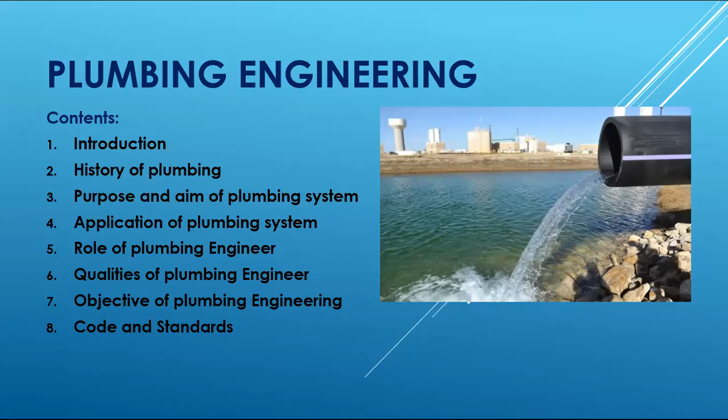Engineering introduction. What is meant by plumbing? The plumbing is a system that conveys fluid for a wide range of applications by using pump, valve, pipe, and other equipment to convey the fluids. So this is the definition for the plumbing system.

The word derives from the Latin for lead. Lead means material. Lead material is plumbum. At the first, pipes used in the Roman era were lead pipe.

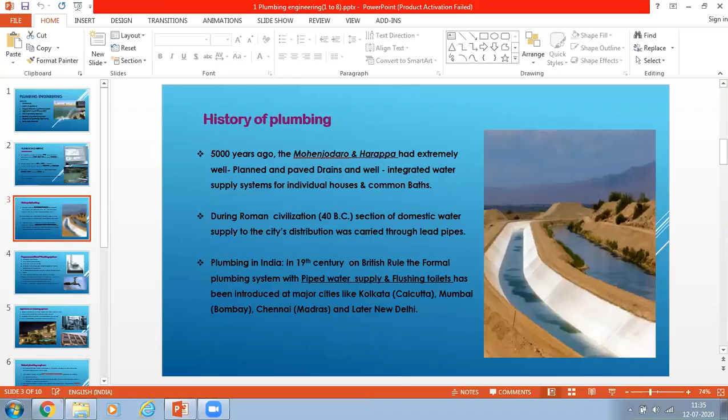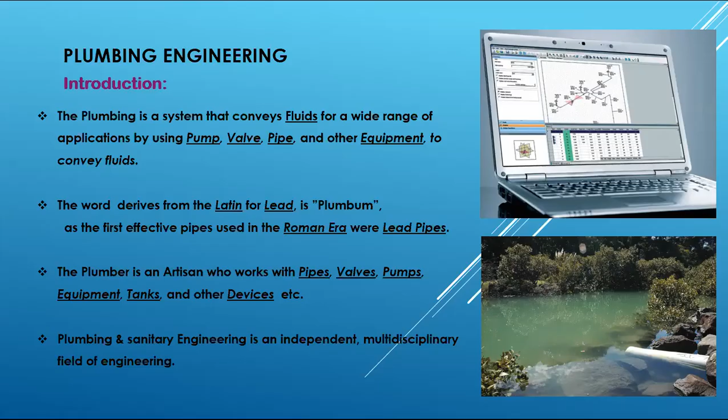The plumbing and the sanitary engineering is an independent multidisciplinary field of engineering. This is the plumbing engineering introduction. History of plumbing. 5,000 years ago, the Harappa had extremely well planned and paved drainage, well integrated water supply system for individual houses and common baths. Some years back, Harappa civilization.

Has well planned drainage and water supply system. They used channel system and independent house connection also. The plumbing has started 5,000 years back. During Roman civilization, 40 BC, domestic water supply to the city distribution was carried through lead pipe. The Roman civilization used lead pipe also.

Plumbing in India: in the 19th century under British rule, the formal plumbing system with piped water supply and flushing toilet was introduced in major cities like Kolkata, Mumbai, Chennai, and later New Delhi. So only in the 19th century we got the plumbing system, because of the British.

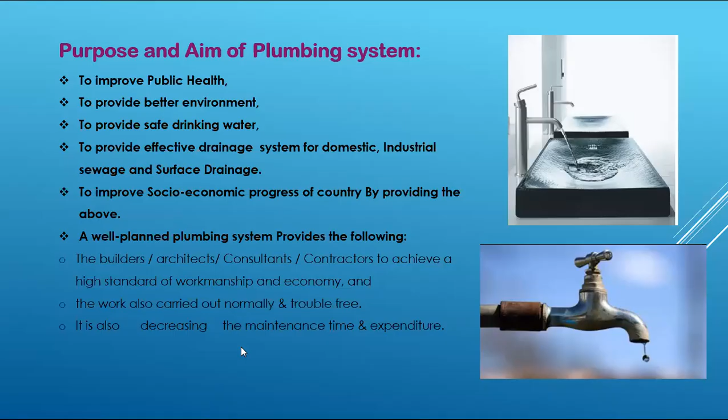Application of plumbing system: where are you going to use a plumbing system? Domestic applications: individual premises, apartments, township, etc. Industrial applications: manufacturing process, etc. For the industrial building, we are providing water supply for employees, and also for equipment and washing purposes, we are providing water supply and drainage.

For example, for a food factory like Maaza and Coca-Cola, we are providing water supply for the manufacturing of the bottles and juices. Then we are also draining the effluent water from the equipment and treating it. Again, you give the treated water to equipment or for flushing the toilets. We are recirculating the water also.

Commercial application: malls, multiplex complexes, hotels, hospitals, etc. We are providing plumbing systems for water supply and drainage. Public transportation like railway, airport, bus terminals, etc. We are providing water supply and drainage for the public.

For individual houses, apartments, townships, etc., we are providing STP, sewage treatment plant, for treating the sewage. For industrial and commercial applications, we are providing ETP, effluent treatment plant, for treating the drainage. For public transportation like railway, airport, bus terminals, we are providing sewage treatment for drainage recirculation and treatment.

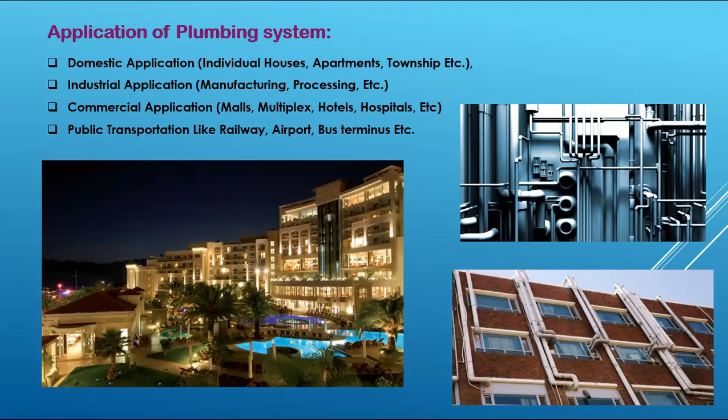Hello, all are listening? Yes, sir.

Yeah, listening, sir. So we are going to the role of the plumbing engineer. Plumbing engineering studies all aspects of engineering and design of the water supply and drainage systems required in the building. The plumbing engineer is to protect public health and environment by providing the following: first, safe drinking water and an efficient and adequate drainage system designed scientifically by using basic hydraulic principles and practical consideration.

For water supply and drainage, we are going to use scientific formulas. But you also have to keep in mind some basic parameters and practical considerations. Don't just use a formula and put it into your pipe size and flow. You have to consider site conditions, what they are going to use, and who the people are that are going to use this system. Then only you apply it.

Otherwise your cost will increase. Sometimes you will not provide pipe and water supply in some area. Sometimes you are not going to provide drainage for some area. So you have to keep that practical consideration in mind. Then only you can give a better plumbing system.

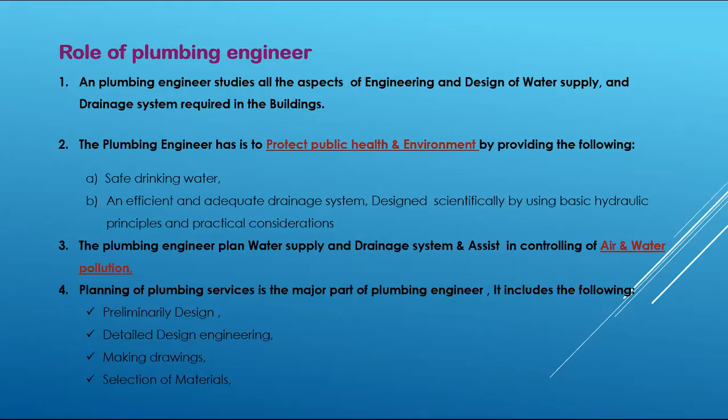Estimating cost, preparing tenders. After estimating the cost, you prepare the tenders. Then selection of the contractor. Then periodic and site inspection. After launching the project, after giving it to the contractor, you have to do periodic inspection. You are the engineer, the plumbing engineer.

You have to visit and see what is going on at the site, whether they are following our drawing, our design, our product. Every time you have to watch and give a report to the client. Periodic inspection and periodic site visits, and accepting the work after commissioning.

After completion of the above, you have to accept the work. See if it is okay, then you have to accept it and sign off the finished product. That's all. That is your work.

Qualities of a plumbing engineer. The plumbing engineer must be educated and trained. Educated means not only being educated, but you will get knowledge of the plumbing system. So that is called educated. And trained also. He must hold relevant knowledge in hydraulic, mechanical, civil, electrical, fire protection systems, etc., in order to plan the services efficiently and economically.

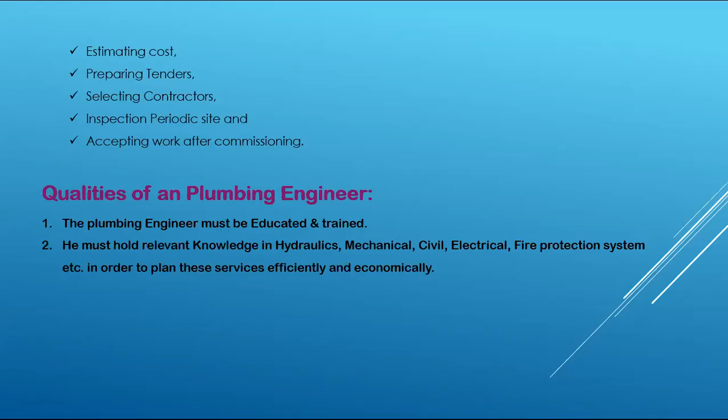Objective of a plumbing engineer. How we will achieve our plumbing role. We will achieve the plumbing role from the following objectives. Objective A, water supply. Provide safe drinking water. Provide adequate supply of water. Safe drinking water means what? You have to give it without contaminating the drinking water. The drinking water should not be contaminated with other products, drainage or some other particles. We have to give safe drinking water.

We have to give a proper overhead tank or underground tank or some above ground tank. You have to provide it for the drinking water. It should not be contaminated with other services, other types of materials. And provide adequate supply of water.

Adequate supply of water means, for example, think of an occupancy of 100 people living in an apartment. If you are giving some 1,000 liters for the 100 people, it will not be sufficient. For the 100 people, you have to give at least 135 liters for each person for economic services. 135 liters per day into 100 people. So 13.5 thousand liters. You have to provide 13.5 thousand liters for economic classes.

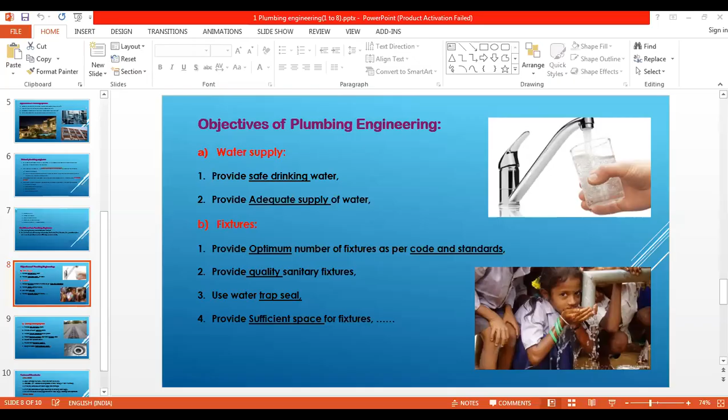We will see in future how to calculate water balancing and the water supply system and all. So now we are telling the fundamentals only. And the fixtures. Provide an optimal number of fixtures as per code and standard. For one house where 5 or 4 people are living, how many toilets are you going to provide? One toilet for each person is more. It will not be optimum. But providing only one toilet for five people is also very troublesome.

If you see a common family, some 10 people are living. If you are providing a single toilet, and five people are going for a job or some other business, it will be trouble in the morning. That's why our board also gave some formula for providing toilets and fixtures. Based on the code only, we are going to provide the number of toilets, number of fixtures, number of taps, everything.

Provide quality sanitary fixtures. Quality sanitary fixtures means a lot of fixtures are there in the market. So you have to compare cost wise, quality wise, and lifetime also. You have to compare with previous project feedback. Sometimes in a previous project you provided some fixtures that did not perform as you expected. You will get the feedback from the client or builders or buyers. Then based on the feedback you will change the product for the present project.

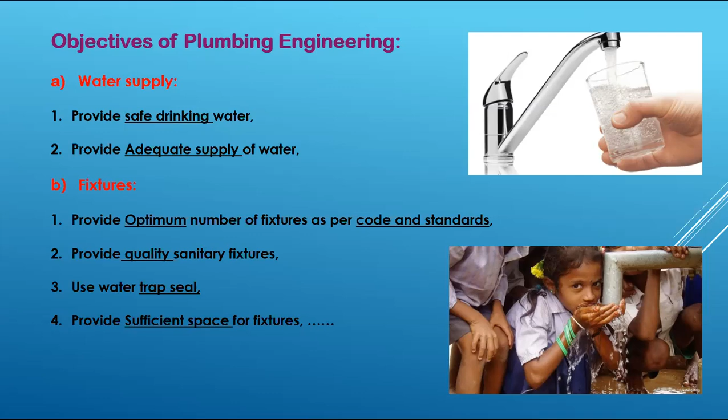Drainage and sewage system. Provide a safe drainage system. Safe drainage system means the drainage system should not contaminate the other pure water or rainwater system. Provide a sufficient ventilating system. If you have one toilet without a ventilating arrangement, are you able to use the toilet? You can't. You can't stay in the toilet even 1 minute. So every toilet should be ventilated.

Then also our plumbing system, piping system should be ventilated. Water supply also, drainage also should be ventilated. Then only you will achieve good performance from the drainage system and water supply system. You can also see every drainage system has ventilation on our roof. If you see on our roof, there will be a vent cowl for each vertical stack.

Provide supplementary ventilation. We have different ventilating systems for large plumbing systems, large plumbing drainage systems. We have a different ventilation system also. You will see it in depth in future.

Prevent foreign substances into the system. Foreign substance means if you have a drainage system or trenching system, somebody will put a bottle or some polythene covers or something. For preventing that, we have to provide a pakka covering system, then only other particles will not go inside the drainage. So you have to provide a pakka covering system for the underground water supply also. You have to cover. Then only other particles will not enter your plumbing system. Then only you will achieve a pakka plumbing system.

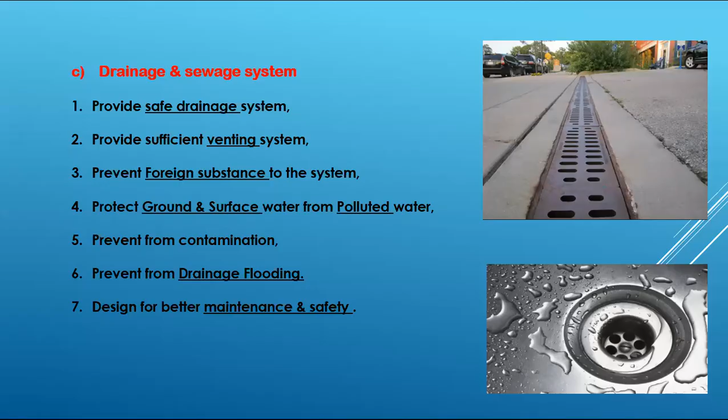Code and standard: what are the basic codes we are going to use for the plumbing system? You have to keep this in mind. First, while designing the project, think about whether it's a Chennai, Pune, Mumbai, or Delhi project. You have to think about the local municipal bylaws and local law, because every city has its own local laws.

Local laws specify how many taps we have to provide, how many toilets, how many sumps we have to give, what storage type, whether STP is required or not - everything is provided by local municipal laws. Only then will you get approval from the municipal corporation; otherwise they will not give approval.

Then you have to follow NBC, which is common for all of India. You have to follow the National Building Code of India. In Group 5, Part 9, the plumbing system comes. From Part 9 only, you get the plumbing codes. You also have to see all other codes, for providing chamber sizes.

Everything you have to see - other civil codes and for fire, especially firefighting, you have to see the firefighting code also. Everything is there in NBC. Based on NBC only, they have derived the municipal laws also. Sometimes they modify a little bit - 10% extra, 10% less. So first you have to see the local municipal law and NBC.

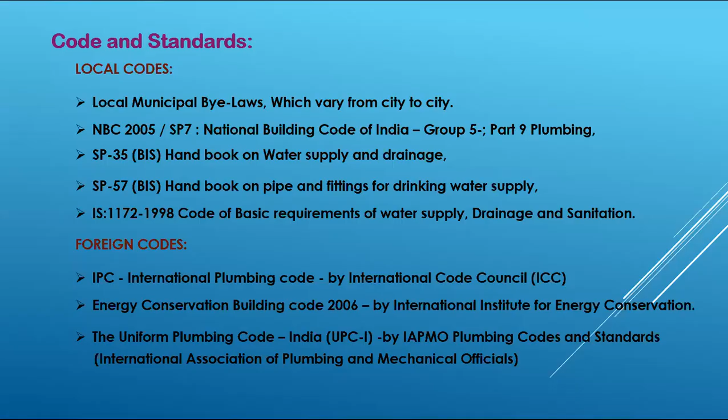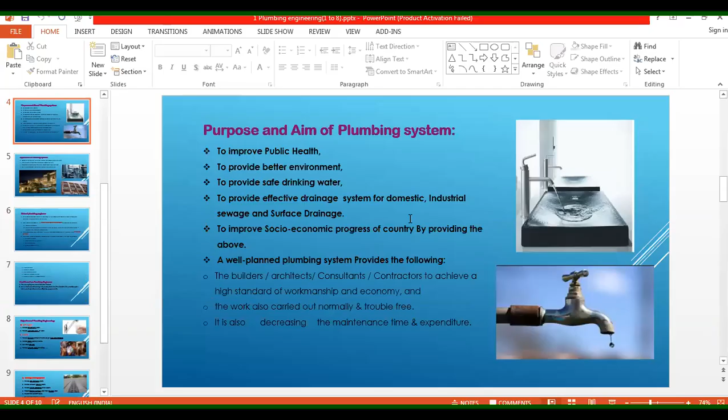We'll go for the other window.

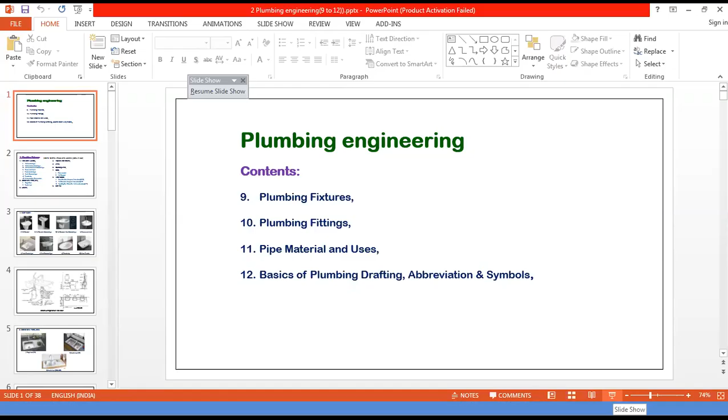Plumbing engineering content: plumbing fixtures, plumbing fittings, pipe material and uses, basics of plumbing, drafting, abbreviations and symbols. So we will first know the plumbing fixtures - the types of plumbing fixtures we have.

Wash basin and lavatory. In wash basins we have several types: wall mounted type, wall mounted pedestal type, wall mounted semi-pedestal type, corner wash basin, under-counter type wash basin, semi-recessed type wash basin, counter top wash basin, and above-counter or over-counter wash basin. These are the 8 types of wash basins we have.

Kitchen sink or pantry sink are both the same - single bowl or double bowl. Normally single bowl only is used in the pantry area. Double bowl or single bowl are both used in the kitchen based on client requirement. Sometimes triple bowl is also there, and customized kitchen sinks are also there, based on the client's requirement we will provide.

Lab sink we will use in lab area, lab projects, hospital projects. Normally ceramic, vitreous china, concrete, plastic, wooden, or stainless steel - a lot of materials will be used for the sink and lavatories. Mop sink and servicing sink we will provide in the service area.

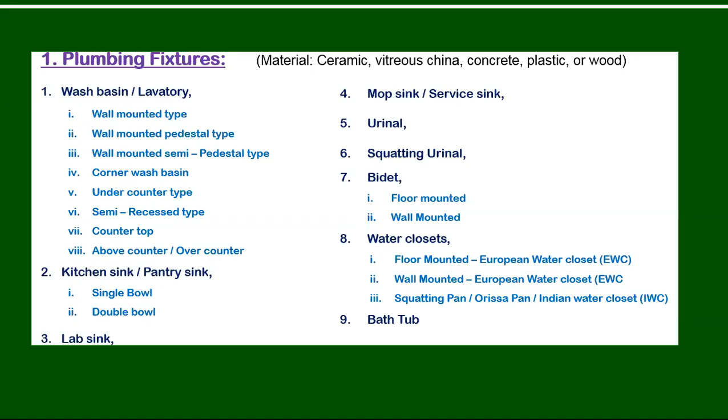Wash basin - you will see wall mounted wash basin. It will be mounted, one tap will be there. Wall mounted pedestal type - pedestal means this vertical material will be there. Now this is called pedestal. It will support the wash basin also. Wash basin will not pull down, it will mount in the wall itself by screwing or bolting.

Then additional support will be there, that is called pedestal - this vertical piece is called pedestal. Wall mounted and semi pedestal type - the semi pedestal piece will not touch the ground, the pedestal will be semi, half size only. It will cover the bottom pipes and drains, cover them and give a better look.

Corner wash basin - when space is not available, we will use corner wash basin. Suppose in our project space is very limited, very little space to provide toilet, we can save space by providing the corner wash basin.

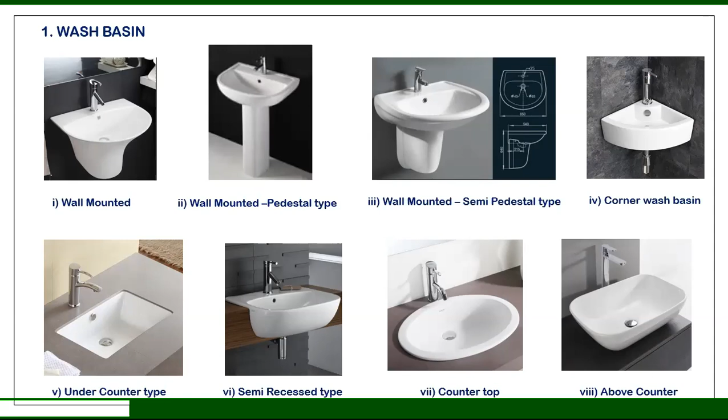Then we will provide for the mixer - instead of just providing a bib tap, we have to provide a mixer. Then you can use whatever temperature you require, you can adjust and use it.

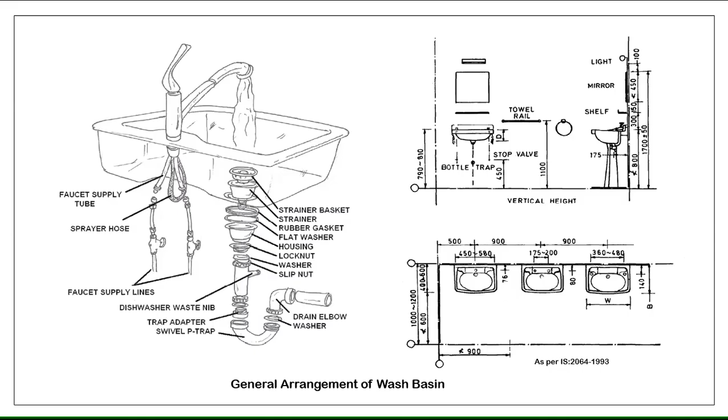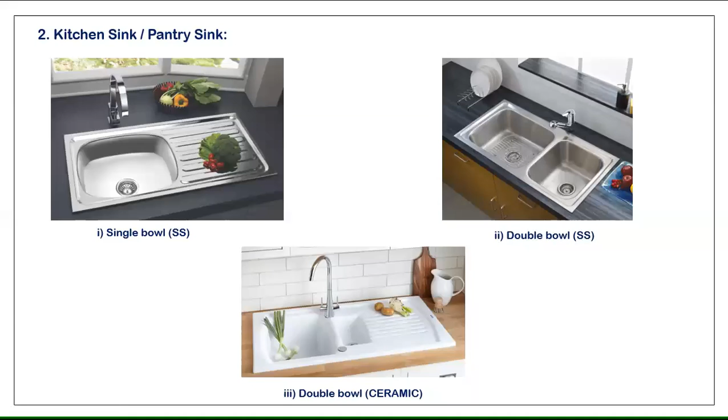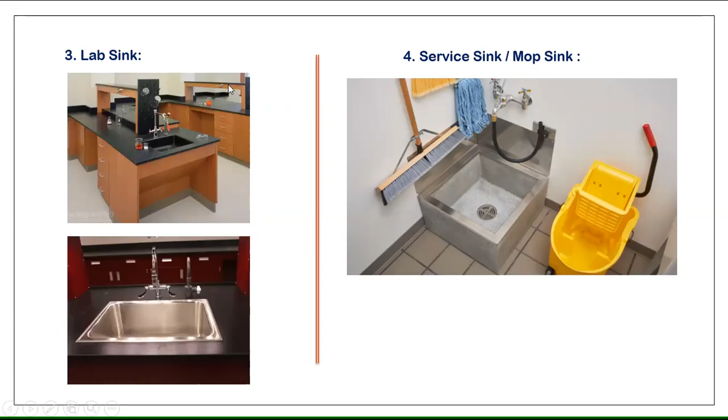The general arrangement of sink and wash basin are both the same. If you look outside there will be a difference, but the drainage and water supply are both the same. Both will have a faucet and mixer. After that, connecting hoses and angle valves for hot and cold water will be there, and supply lines will be connected into the angle valves. These are the water supply and drainage, the same thing.

Strainer basket, strainer, rubber gasket, flat washer, housing - all these things will be kept into the housing. The housing will be locked by the lock nut and washer, slip nut, and the dishwash nipple. If you have a dishwasher in the project, you can connect into this link; otherwise, you can also put it into the floor line. Slip nut, washer, everything will be there.

Here also we are going to provide a P trap or bottle trap. P trap is the traditional one; now alternatively we are providing bottle trap also. Bottle type, if you see in a hotel or some other commercial building, will be there at the bottom of the sink or wash basin - that is called a trap. This is very important for our plumbing system; it prevents foul gas, and insects from the main drain.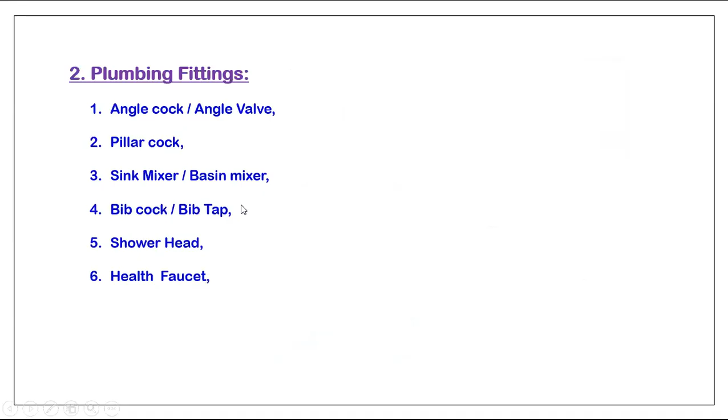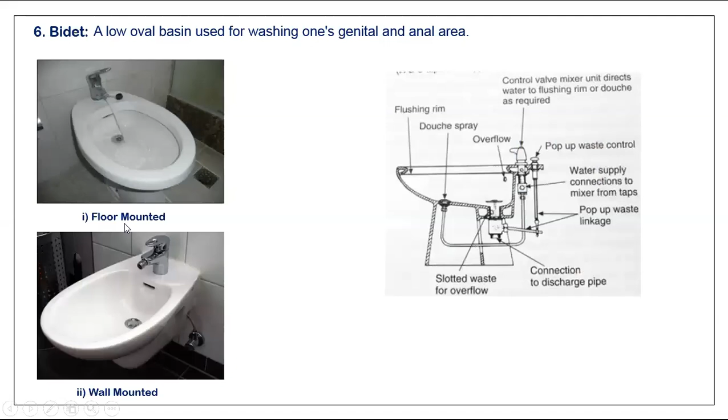We are using, earlier we are using, this is called angle valve. Angle valve or angle cock here in the bottom. For controlling purposes we are using it. If we don't want water completely, we can turn off these valves. Here, water will not be there.

Suppose this pillar cock is not working, it is leaking. We can close it here. For that purpose only we are using the valve. We are not connecting directly to our wash basin or kitchen sink or other plumbing fixtures. We will provide it, only then we are taking the water.

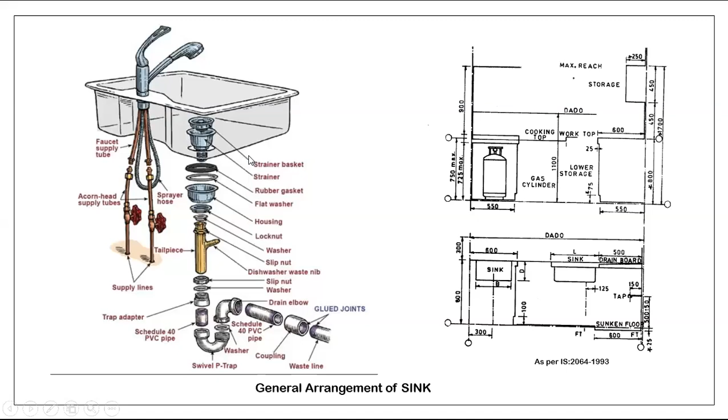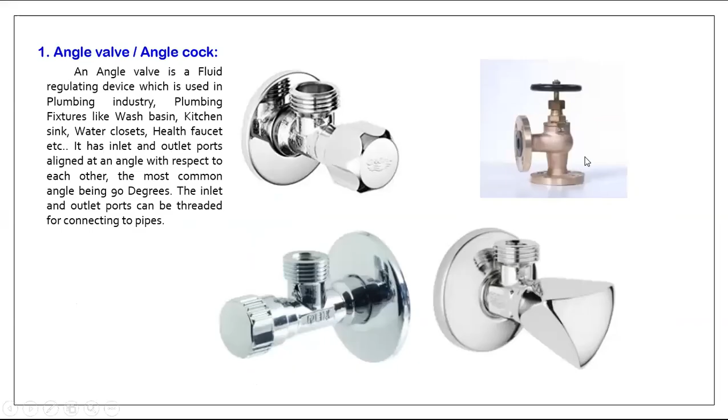Pillar cock. Normally we are using it for the wash basin, above. This is a draw-off tap with a vertical inlet and an up tilted or horizontal free outlet, which is used in the wash basin. Normally we are using it for wash basin outlet purposes only. Here in the bottom we are connecting the hose, a 15 mm hose. If you turn the head, you will get the water from this outlet. So this is a typical arrangement of a pillar cock.

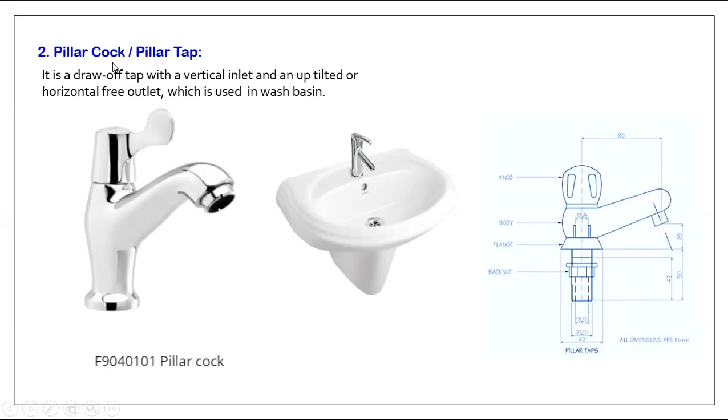It is a draw-off tap with hot and cold inlets and an up tilted or horizontal free outlet, which is used in kitchen sink, pantry sink and wash basin, etc. So here, left side hot water and right side cold water connection will be there. How much heat you want, you can adjust, you can turn, you can use. Like that it will be there.

Here left side hot water, here right side cold water. Here you can turn it also a little bit. Here, for the kitchen sink they have provided it. If you want water here, you can turn it here and use. If you want the left side, you can also turn. For both bowls you can access. So sometimes you will provide a single bowl system or a double bowl system in the sink.

For both the bowls you can use this type of sink mixer and basin mixer. This type of picture is also the same like this. You can turn this outlet pipe 90 degrees. Left side hot water, right side cold water. However much temperature you want, you can turn.

This is a single lever sink mixer with the swivel spout. This is the swivel spout. You can turn it 90 degrees or 180 degrees based on your requirement. Left side hot water will be there, right side cold water will be there. You can adjust the ratio of mixing and you can use it.

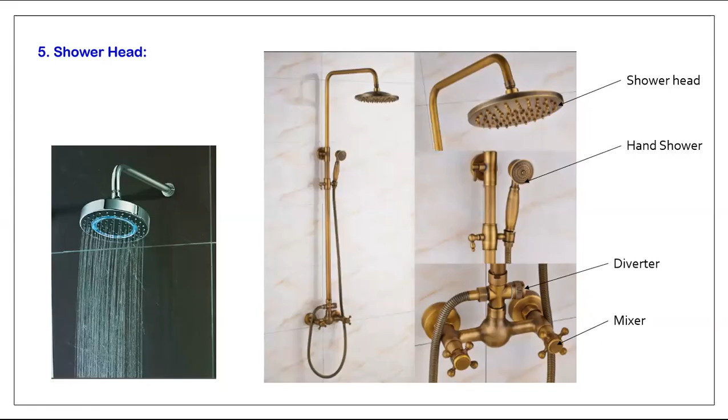And the health faucet. The health faucet is used in the toilet. It is always fixed on the right side of the toilet. If you sit on the toilet, you can take it with your right hand to wash. It is connected by the 15 mm hose with the angle cock, using this angle cock.

The inlet is coming here this way. Horizontally, the water inlet comes. Vertically, the water will go upwards or downwards. The outlet will be vertical, the inlet will be horizontal.

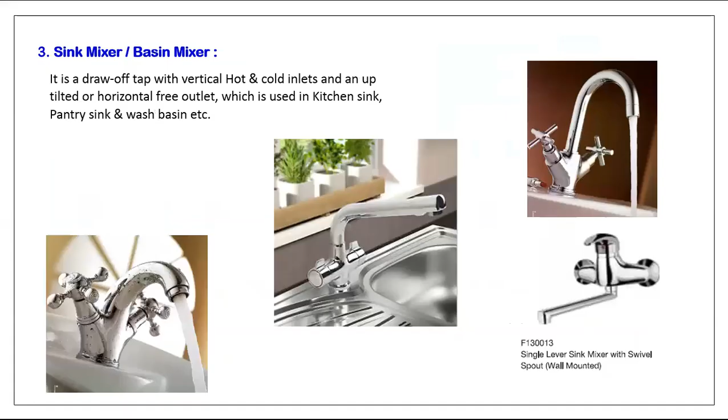So these are the plumbing fixtures and fittings we typically use. Other pressure fixtures will be based on client requirements, which we can also provide. These are the basic requirements.

Now we'll go over the pipe material used in the plumbing system. Pipe material, metal pipes, classification, metal type: galvanized steel or iron, GI pipe. For the joining method, we use threaded joint, welded joint, and flanged joint with screw joint.

Normally we use concealed pipe, and for concealed pipe we use threaded joint and welded joint only. For exposed pipe, we use flanged joint, threaded joint, and welding joints as well. Flange and other joints are used for exposed pipe.

Where we're using water supply, hot and cold water, compressed air piping, compressed air system, LPG system, and irrigation fire water piping - everything uses galvanized iron piping. This is very important, you have to keep in mind what pipe and joint type you're using where, as they will ask such questions.

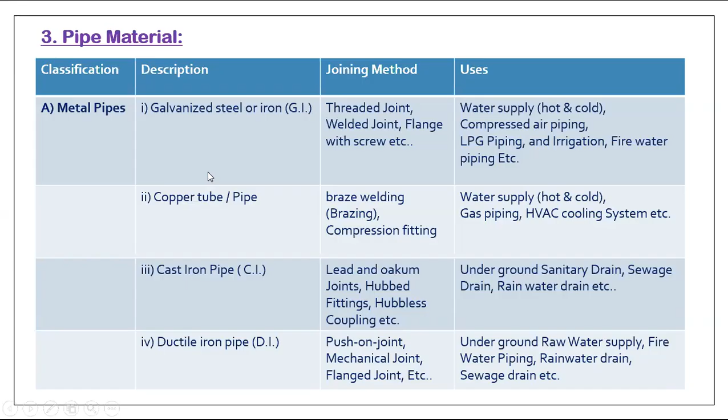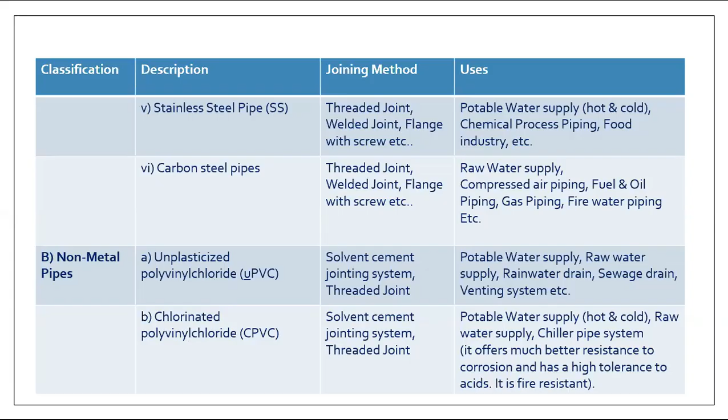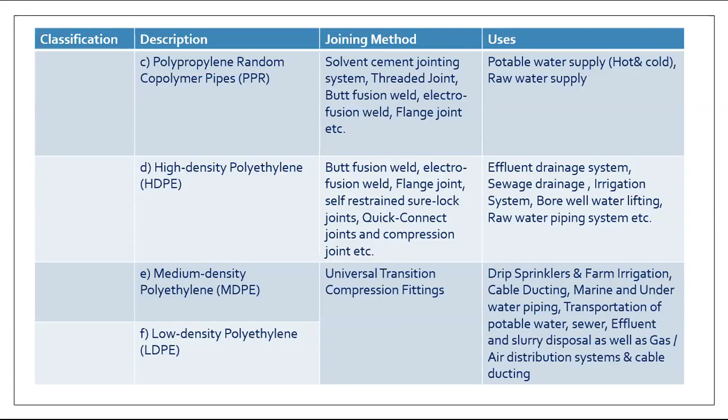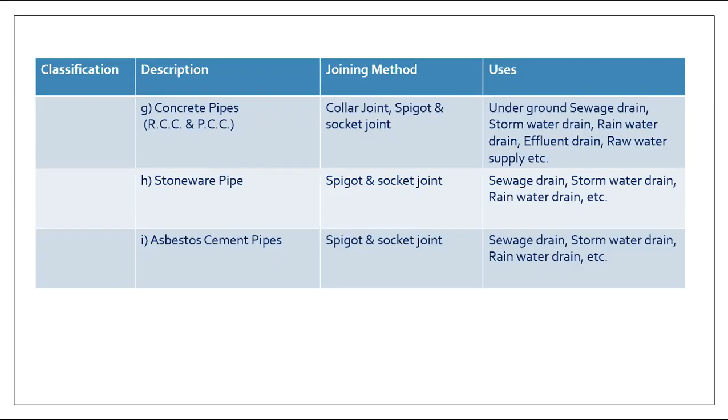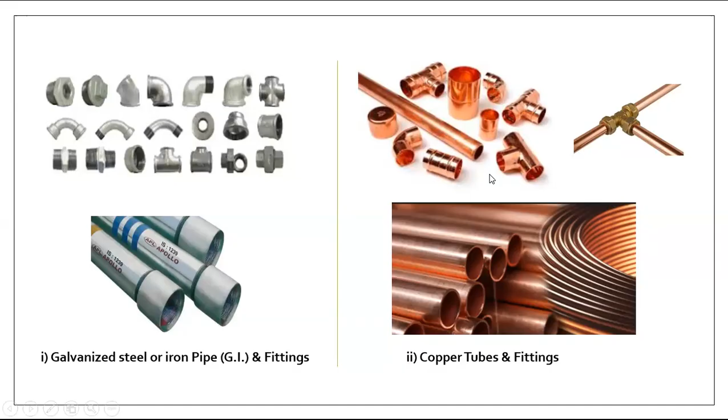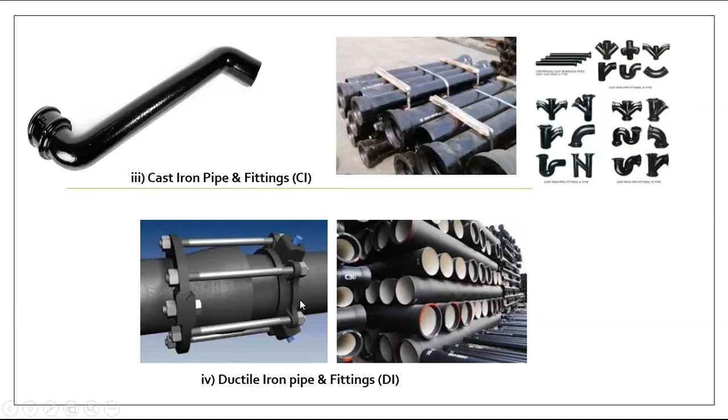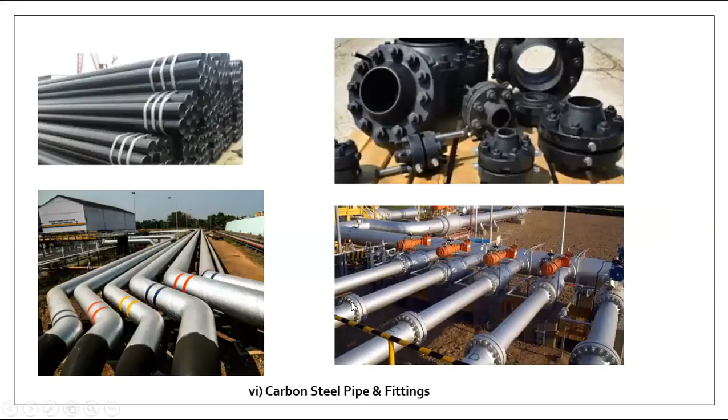Carbon steel pipes. Carbon steel pipe looks like this, black color only. After painting, you can get a lot of colors. Here they are painted with aluminum paint. Widely we are using them in oil and gas, with pipe coating. These are the carbon steel pipe and fittings.

These are the flanges. The pipe connections, how they are connected, how they are supported, pipe supports, everything will be there.

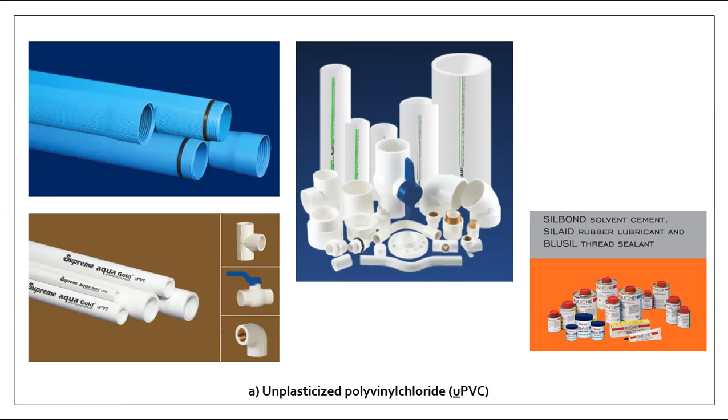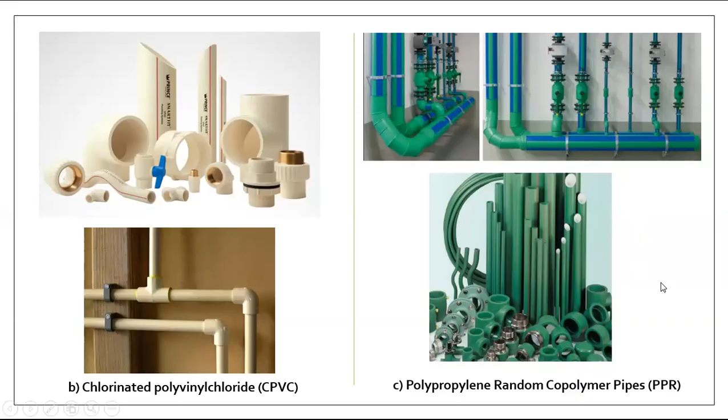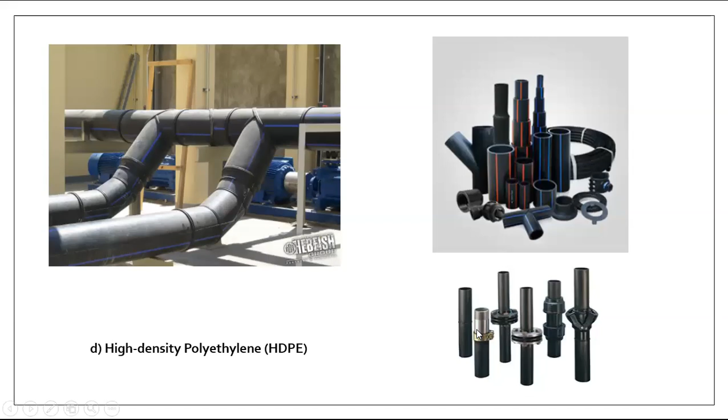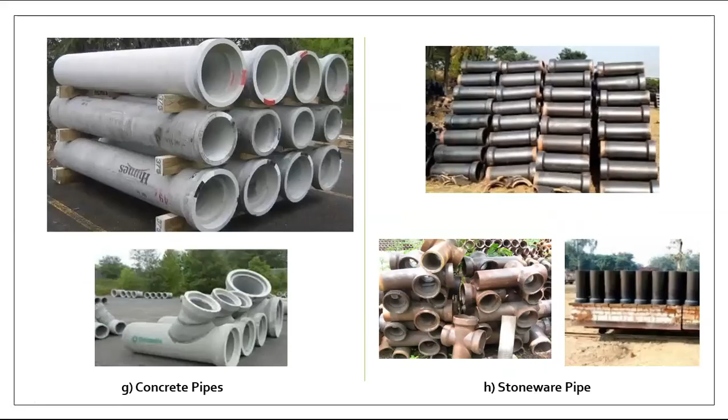Concrete pipe or RCC pipe. Concrete RCC pipe is normally used for low pressure, for gravity pipelines, for drainage and reservoir pipes. All are underground pipes only, not above ground.

These are the stoneware pipes. How are they made? Using clay and river sand. They mix them, first make the pipe, then put it in the furnace and raise the temperature up to some 1,500 degrees. They keep it 24 hours, then slowly cool it, and after that they take the pipe out. That's how they make it.

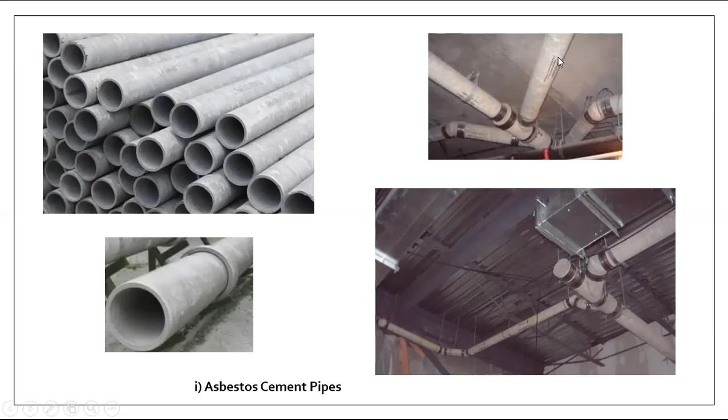Asbestos cement pipe. Long back we used it in India, but nowadays we are not using this pipe. It is prepared with cement. Normally it is used for above ground drainage purposes only.